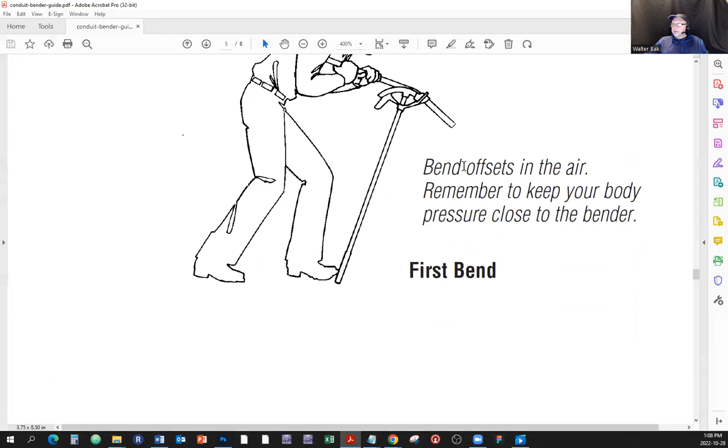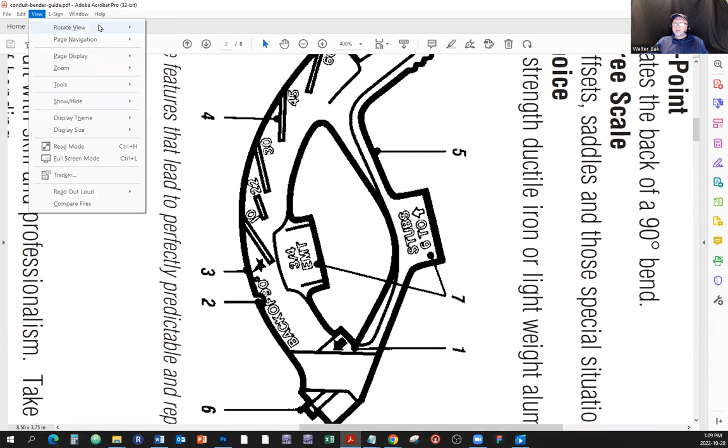Now, let's see, where's the shoe? Here is the shoe of the pipe bender. Give me a couple seconds. I'm going to rotate that so it looks less awkward, because it looks like it's upside down. Rotate view clockwise, rotate view again clockwise. Now we have those

angle markings. Here's a line and it says 10, so that's 10 degrees. Here's a line that says 22 degrees, it's actually 22 and a half. And here's 30, 45, and 60. You can also bend the pipe to a 90-degree angle, but we're not using any of those markings. We use a different technique when bending at a right angle, and you can use a level for that too. And over here you have the hook. Basically, you put the pipe right into that hook.

Here's that little cradle that's going to hold the hook, and it's going to hold the pipe, and it's going to lay in that cradle. If you bend the pipe this way and make it parallel with this line, you have bent the pipe 10 degrees.

If you make the pipe parallel with this line, you have bent 22.5 degrees, and so on. Here are the degree markings. So what do we have? 10 degrees, 22.5, 30, 45, and 60. Why is it 22.5? Why do we even have that? What's that about? Why not 23? Why not 27?

Well, 22.5, if you multiply it by 2, it gives you 90. Sorry, it gives you 45.

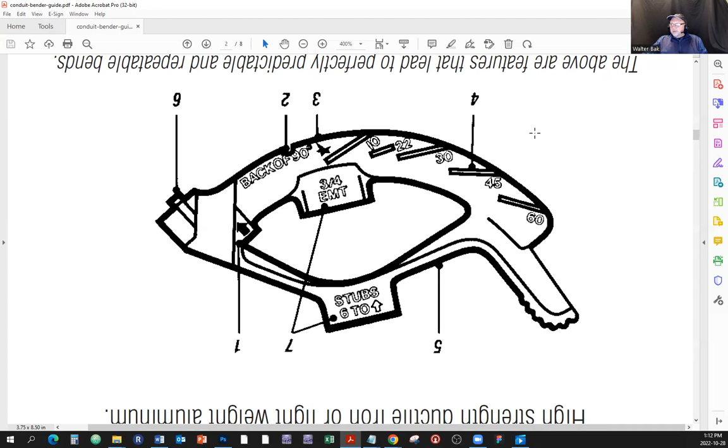We're going to come back to this table. I'm going to explain that just a little bit, so you're going to understand it halfway right now. And then once we go through the whole lesson, we're going to come back to the table and look at it again and see how different it's going to look for you.

So multipliers are different depending on the angle. The only thing that the multiplier depends on is the angle of the bend, nothing else. That's how we find out what the multiplier is. And then we have that shrink with the formula for the shrink. But what does the table say?

If we bend the pipe 30 degrees for the offset, so we bend it 30 degrees one way, and then at the other side we bend it back again,

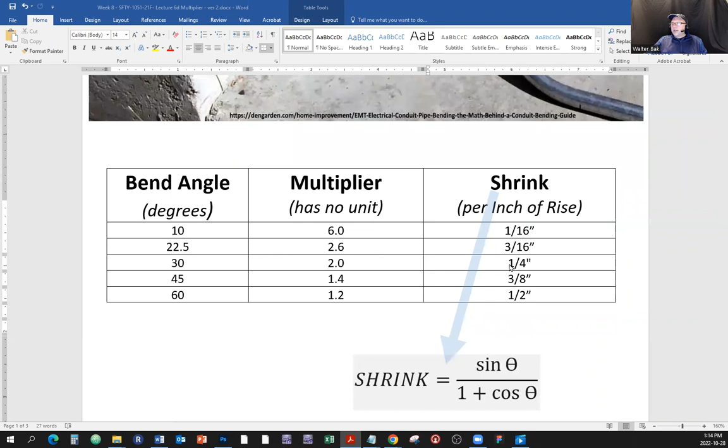the pipe is going to shrink a quarter of an inch per inch of rise. Where is the rise? That is the rise, depending on how high it gets. So this shrink depends on the angle and depends how high we get with this. It depends on that line as well. So the multiplier depends only on this angle, and the shrink depends on the angle and how high we go.

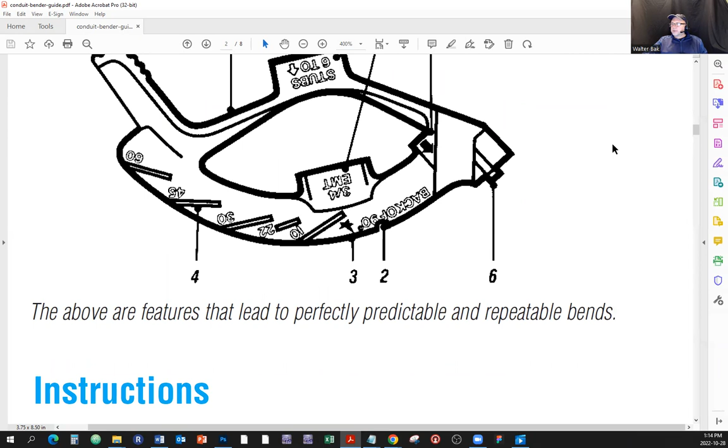Now, what we need to do is find out where to make those bends, the distance between this mark here and this mark. You can barely see it, but it's there. Once you make those marks, let me rotate the view clockwise again, and I'm going to find... offset bends, here it is.

So first, we're going to bend it out of shape one way using the pipe bender, let's say 30 degrees. And then we're going to flip it around and align that arrow. We're going to align that... where's the arrow? Here it is.

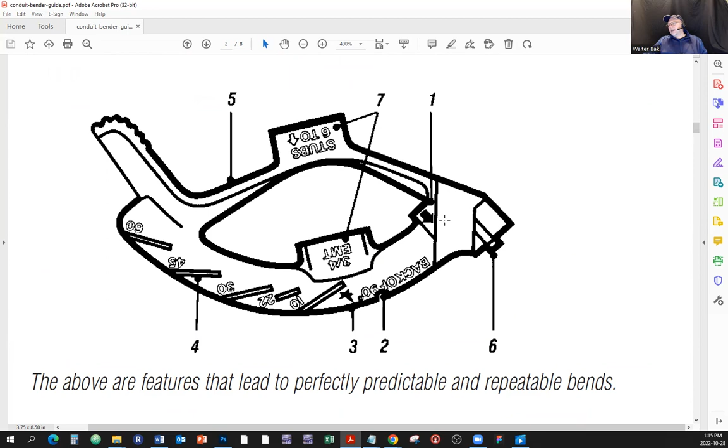That arrow with that other mark. We're going to flip it around and align that arrow with the other mark and bend it back. So we end up with something like this, and that is going to create an offset.

But what we need to do is know the distance between these two marks. Why do we need to know that? It's because when we bend the pipe out of shape at a certain degree, we need to know how far we need to travel in this straight line to get to this height. If we make the marks too close to each other, we're not going to clear that height.

It's going to go lower. If we make the marks too far, we're going to have the pipe too far. We want to be as precise as we can for professional installations. So we need to know the distance between these two marks. And when we do the pipe bending, 30 degrees, for example,

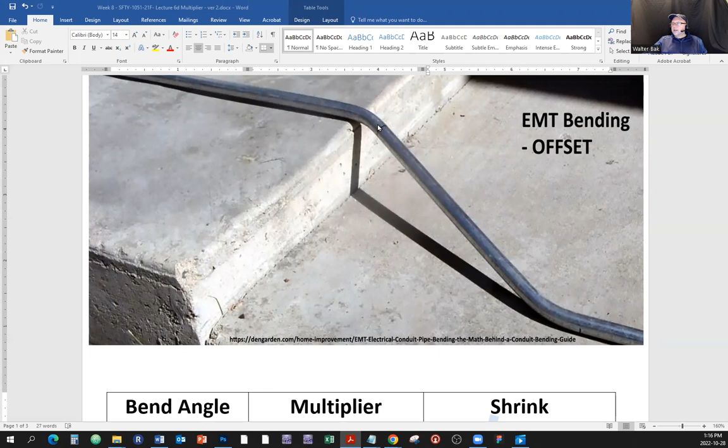and we bend it one way and then bend it back, so we're going to have two parallel sides here, and we're going to have the travel that is just enough to clear that height. Okay, so we're going to come back to this table here.

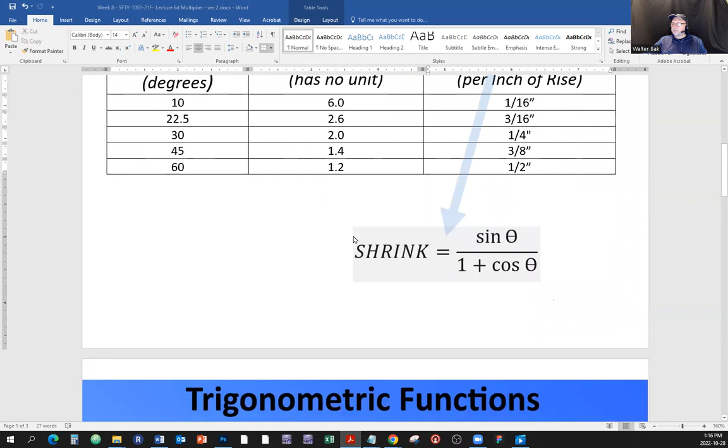Let's look at the right angle because that's what we have. See that? We got the right angle. Pictures don't lie. Well, they do sometimes. So here are the trigonometric functions and their reciprocals. Okay, so let's take a look at the right angle triangle. Here's the right angle triangle.

So here is how high we're going to get with this one, the opposite to this angle, because we're talking about the pipe being bent that much with the angle of theta. And of course, from math classes, you know that if we're talking about this angle right here, this line is going to be adjacent, this line is going to be opposite, and this line is going to be the hypotenuse. So here's the right angle, and here's the theta, and I just put the letters corresponding to the opposite and so on. And you probably remember this SOHCAHTOA thing.

And the SOHCAHTOA thing is that we calculate the sine by dividing the length of the opposite by the length of the hypotenuse. All right, so we get the sine of this angle by dividing this length by that length, and the cosine is going to be adjacent to the hypotenuse, so this and that, and the tangent we're going to get from opposite to the adjacent, and we're going to get some sort of a number, right? And the number that is the sine has no unit. It just depends on the angle. All right, so let's take a look at the functions and the reciprocals.

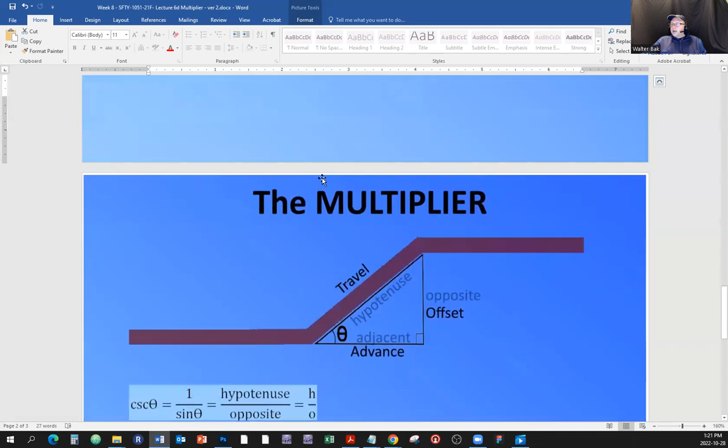Here is the multiplier. Right. Now we're going to get a little bit more of the terminology happening here. All right. So starting from the bend of the angle, in order to clear the height, we're going to have to bend that angle and travel so far, and then we're going to continue on that once we get there. Right? So the distance between these two points, the hypotenuse, is called the travel. It is the travel distance of the bend.

And here, the height, the opposite, that's the offset. And sometimes we call it rise. How much do we have to rise above this bottom line here? And this little thing here, how far the bend lasts, is going to be the advance. How far do we advance with the bend?

All right. So let's take some things, let's analyze some things, let's take them apart. The cosecant of that angle is 1 over sine, which is the hypotenuse over the opposite, right? Cosecant, hypotenuse over the opposite, because sine is the opposite over hypotenuse. Flip it around, hypotenuse over the opposite. So here we got the hypotenuse.

Okay, so here's the thing. The cosecant of that angle, which is 1 over sine, is the multiplier. That's it. Lesson done. Go home. Not really, not yet. We're not done yet. Okay. So the multiplier is the cosecant of that angle.

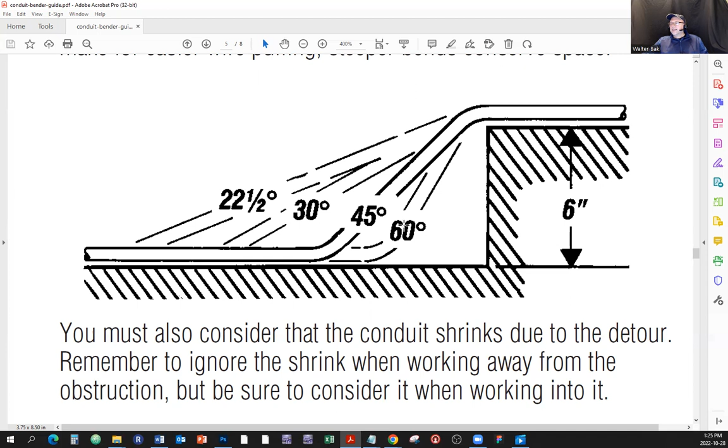Okay. So let's go back to here. Recap. The cosecant is the multiplier based on the angle that we have chosen to work with. Right? The multiplier is based on the angle. The angle of the bend is chosen by us. The distance between the bends is the hypotenuse. So the distance between the bending points. Right here, you have a straight line. If you have a straight pipe, you're going to make a mark here, and you're going to make a mark here, and then once you bend it, that is going to be the distance.

So we need to know, before we bend that, how long this bend is going to be, so we can get to this height if we choose this angle, whatever we choose. Right? So that's the whole science of this thing. If the chosen angle stays constant, and yes, it does, the hypotenuse, which is the distance between the bending points, will change depending on the height of the obstacle.

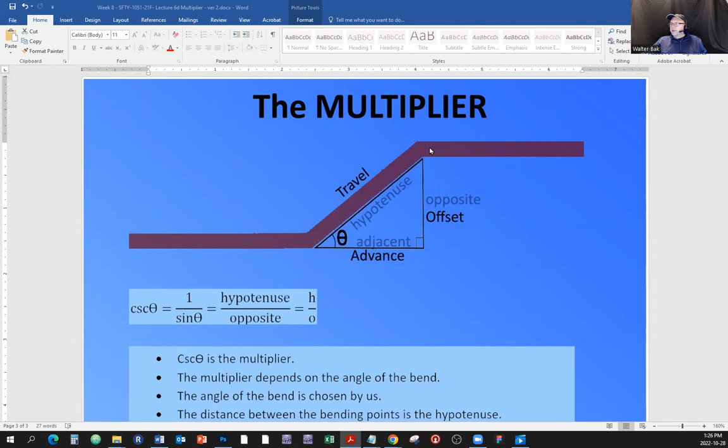Well, the further you get on this distance, the higher you're going to end up. We need to know exactly, not too far, not too close, exactly where we want that to be based on the height we want to get. Okay. The distance between the bend points is the multiplier times the opposite.

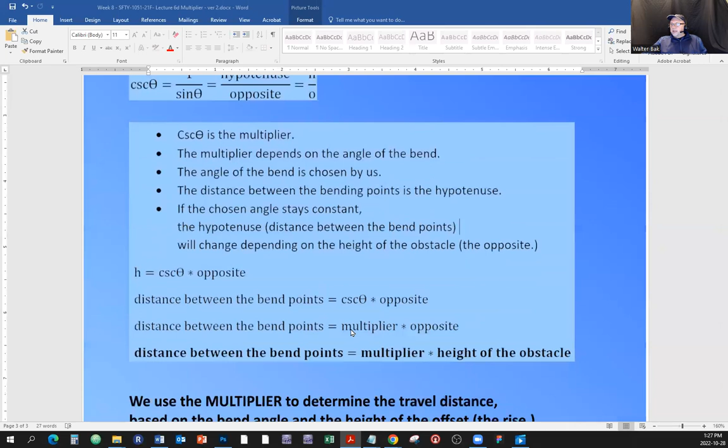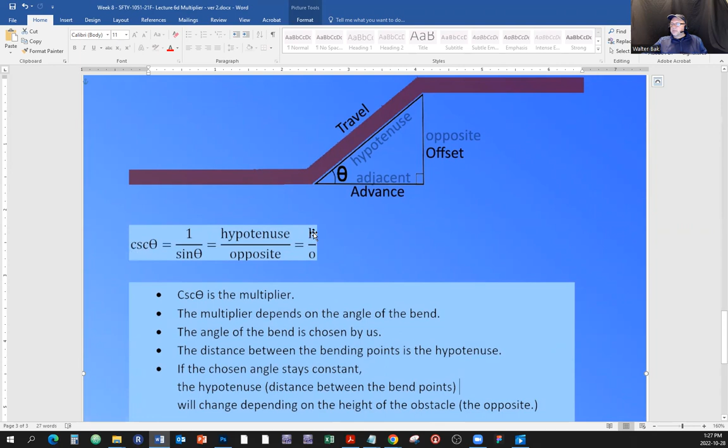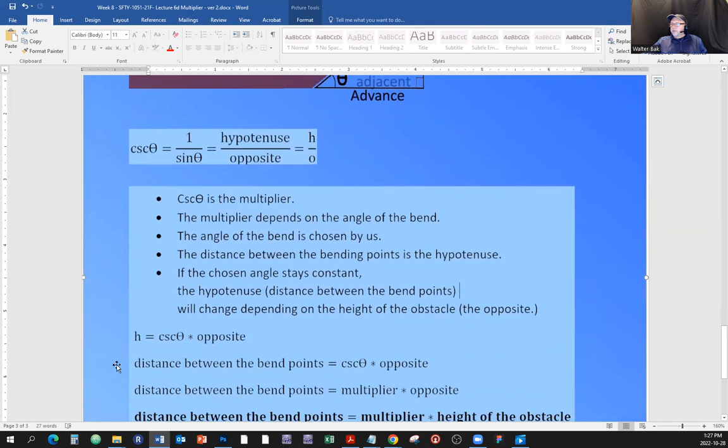How do we get that? From this formula, here's the multiplier, the cosecant, and here's the hypotenuse and the opposite. What we want to know is the hypotenuse, because we know the cosecant from the angle. We know the height, we measured that. We don't know the distance. So from this formula, we derive that the hypotenuse equals the cosecant times the opposite.

So the distance between these 2 points, and this is as simple as it gets, if you remember anything out of this lesson, please remember this: the distance between those 2 points is the multiplier times the height. How do we get the multiplier? It's 1 over sine of this angle. That's the multiplier. How do we know the height? Well, we measure it.

Get your tape measure out, measure how high you have to go, and based on that, you can calculate the distance between those 2 bending points. You mark it here, you mark it there, you bend it one way, flip it around, bend it the other way, and bang, you got the nice, beautiful offset. We use the multiplier to determine the travel distance, based on the bend angle and the height of the offset, or the rise. In other words, the travel distance, the distance between those 2 bend points, is the multiplier times the rise. And that's as simple as that gets.

The rise, can you get it in inches? Can you get it in centimeters? Doesn't matter. If you work with one unit, you're going to stick with that unit. So if you work with centimeters, you're going to have centimeters here. If you work with inches, you're going to have inches here. Okay. So that's it for this slideshow.

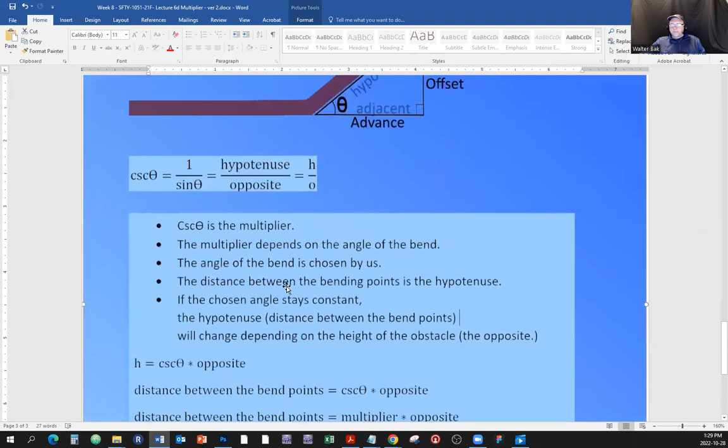Now let's take a look at some table. Let's go back to that table here, because what we have here is the table again for a quick reference. For a quick reference, if you're bending things 30 degrees, the multiplier is 2. So you don't have to get your calculator. You look at the table and the multiplier is 2. And then how much is the pipe going to shrink?

Let me get my board going. There we go. Here's my board. How much is the pipe going to shrink? So let's say you have a pipe going in a straight line, and it has a certain distance. If you have that same pipe and you bend it, of course, that distance is going to become shorter, because we're going to lose some of the length on the distance. So it's the shrink of the pipe.

It's not that it's made out of rubber and is going to shrink. No, it's the distance between here, the vertical distance right here, from here to there. And sometimes we need to know when they're going to fit the pipes into some sort of a box or whatnot. And yes, sometimes we need to know what the shrink of the pipe is going to be. Okay, and how do we calculate the shrink amount? Now, here is another formula that you're just going to have to remember, or at least know where to find it. The shrink amount is the sine of the angle divided by 1 plus the cosine of the angle, and you're going to get the shrink amount per the distance of rise.

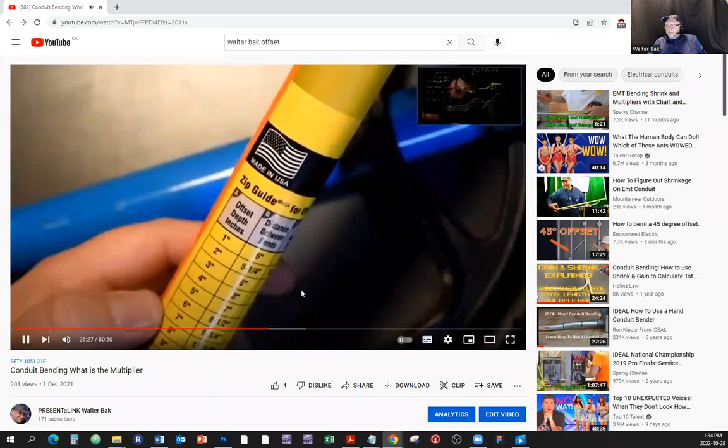Let's see when I turn this thing. I just keep turning that. So here is the 30 degrees. All right. Here's the angles. They put it in the middle of the table. So here's the 30 degrees. And if we want to clear 3 inches, then the distance between the marks is going to be 6. There you go. See that?

And you see the pipe, and they don't give you per inch of rise. They're giving you the final result. The pipe is going to shrink 3/4 of an inch. So it's a quick reference. That's how you read the table on the KLEIN, the sticker on the KLEIN.

Now, here is the sticker on the ideal, on the handle. So let's say we want to clear 3 inches. And here is, you can't see it, but it's above. It's just based on the angle, different angles here. That's how that table is organized.

That sticker is organized. We want to clear, we want to use 30 degrees, then the multiplier is, or not the multiplier, we're getting the distance between the 2 points is 6 inches, and the pipe is going to shrink 3/4 of an inch. So it's a quick reference sticker on the KLEIN and sticker on the ideal pipe bender, which we have.

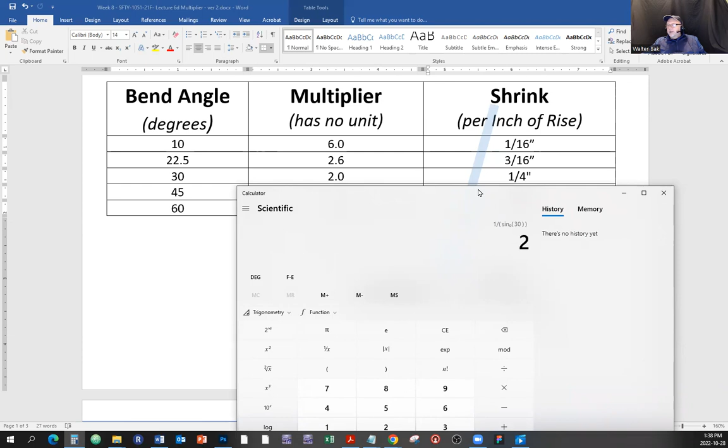Right. Now, how many inches do we need to make the distance between the marks? Okay, that depends on the rise. So if we want to clear 3 inches, we multiply that multiplier by 3 inches. So times 3 equals, magic, it's 6. All right, so here's the thing. 3 inches, 30 degrees, 6 inches between those 2 marks. The pipe is going to shrink 3/4 of an inch.

How do we get that? Well, we get the sine of the angle, which is half, which is 0.5, and we get the cosine. Let's get the step by step here. All right, calculator again.

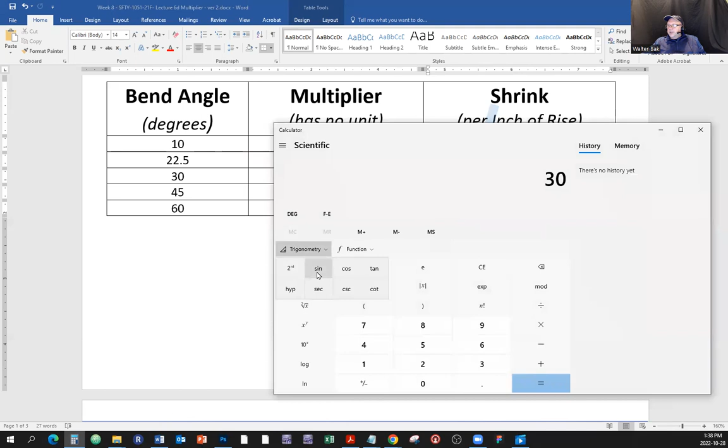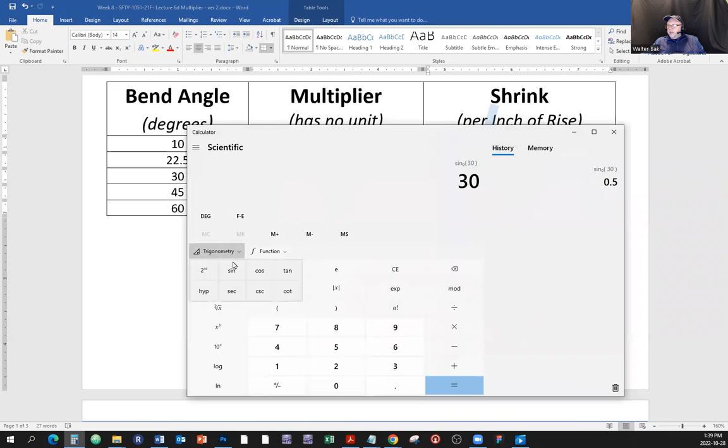So 30 degrees, trigonometry, sine, it's 0.5. Remember that, okay? So that's the sine, that's going to be on top. What's the cosine? 30 degrees, trigonometry, cosine. There you go.

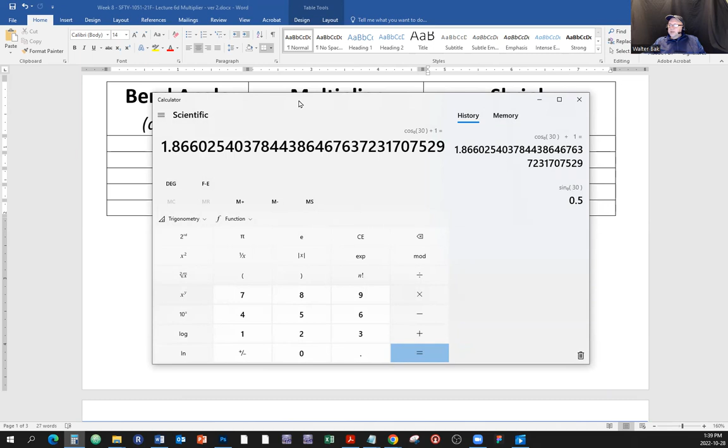0.866. All right. Well, but we have to add 1 to it. So let's add 1 to it. Plus 1, okay, so we get 1.87, let's say. All right. So we're going to get the 0.5 divided by 1.87. Okay, well, let's do that.

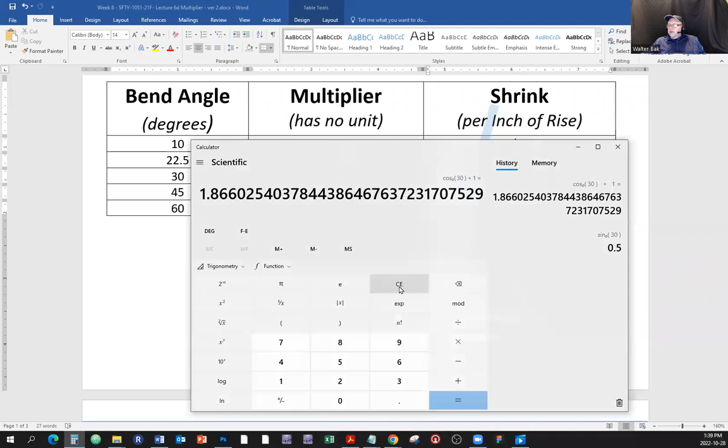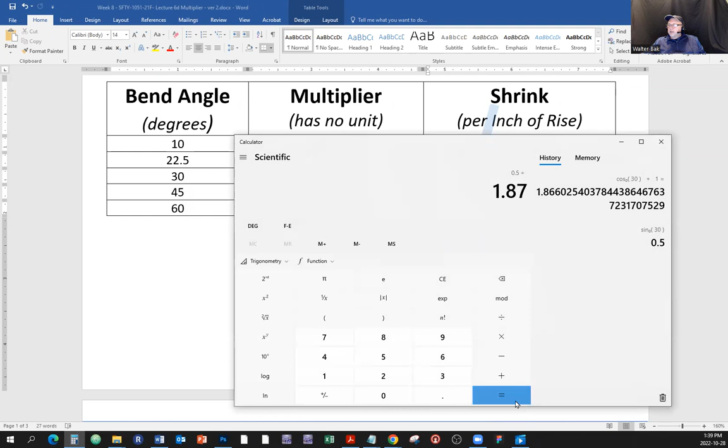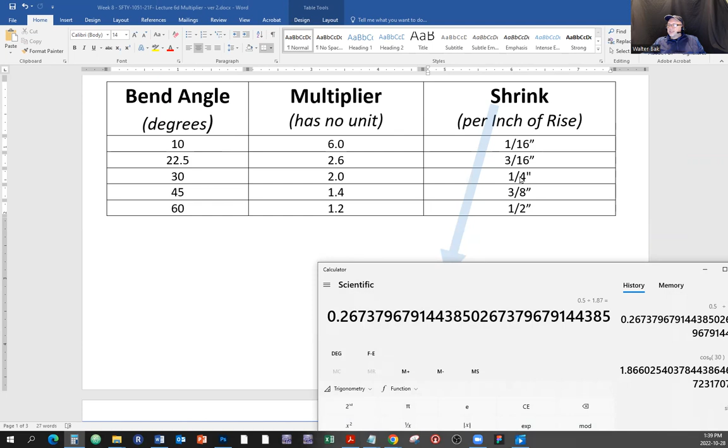0.5 divided by, what did we get? 1.87. That gives us 0.26. Oh, look, it's so close to 0.25. So it's quarter inch. It's very close to quarter, right?

And there's a way to transfer that. I'll leave that with you. And if you can't figure it out, I will touch on that next time we see each other. So it's quarter inch per inch of rise. So if we're clearing 3 inches, we're rising 3 inches, we have to multiply it by 3, times 3 equals 0.8, which is pretty much close to 0.75, which is close to 3/4.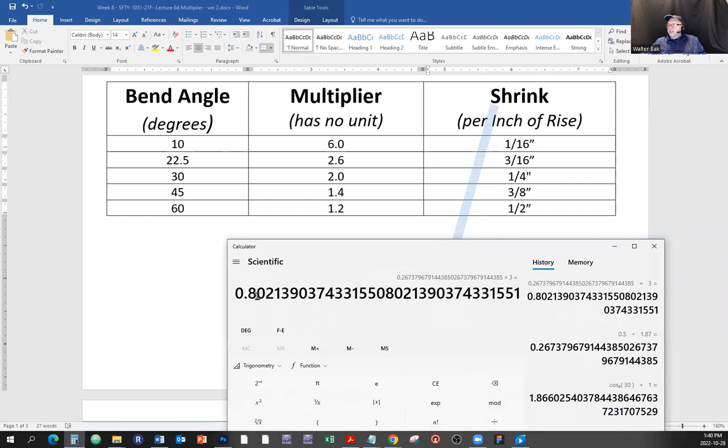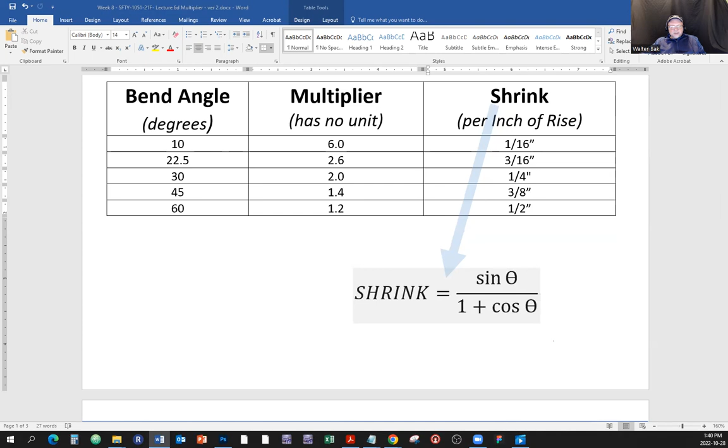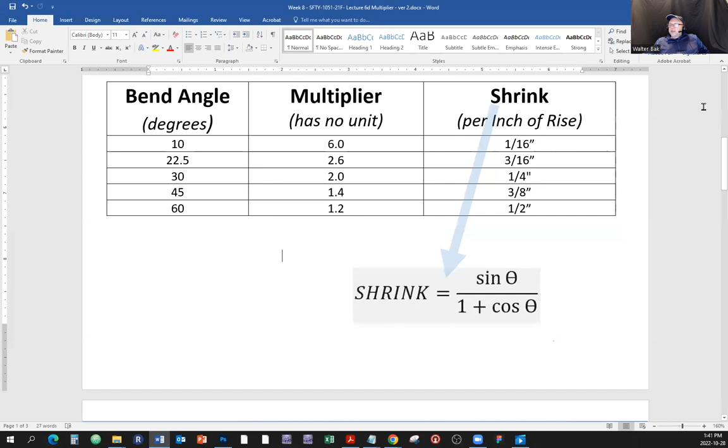All right, so the sticker, what does the sticker tell us? It tells us that the pipe is not to the millimeter, but to some kind of a close round number. So 3/4 of an inch is a close round number. So we want to clear 3 inches. If we use 30 degrees, we're going to make 6 inches between those two marks, and the overall length of the pipe is going to be 3/4 of an inch shorter, because we're clearing 3 inches and we have 1/4 of an inch per inch of rise. Right?

That's pretty much all that I wanted to show you here, as far as the multiplier and the shrink. So sometimes you might want to watch it a couple times and get some of that to sink in.

Also, when you do your labs and you are finished earlier, don't just drop things and go home. Spend some time, use it. I can challenge you. As long as you want to stay, I'll throw things at you to give you more. Stay over. Get the pipe bender. They're hanging by the stairwells that will go to the upstairs cubicles. We have a lot of pipe there. Just grab one of those, cut it to length, and start practicing the bends.

Plus, in one of the labs, we're going to actually make 2 box offsets, which is an offset, except the end of the pipe is going to be mounted on the box, and we're going to rise it 3/8 of an inch. All right.